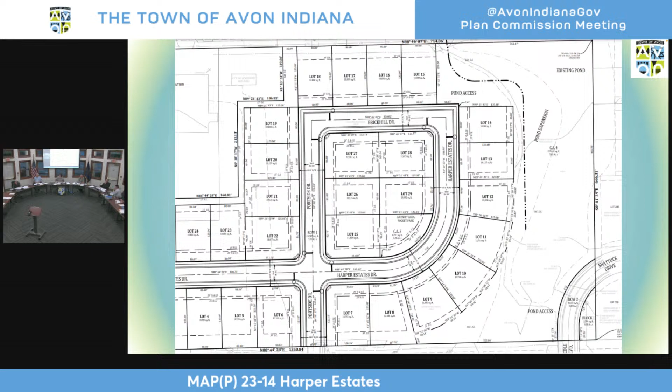As part of this subdivision, the church will lose its access onto Dan Jones Road and will connect to the access road here, so we'll get a closer view of that. There's a new drive along Harper Estates Drive. The pond here will be expanded to accommodate the increased runoff.

As I said, the subdivision of lands is occurring in conjunction with the town's Dan Jones widening project, so access, stormwater, and parkway have been designed together with the town. A lot of the details aren't totally finalized regarding the stormwater detention and things of that nature, but they'll be further reviewed throughout the final plat review process, as is typical for plats.

Because of the design of the stormwater detention pond, and the petitioner will be able to touch on this a little more, being designed in conjunction with the town and accounting for the town's runoff as well, they are unable to accommodate a 30-foot buffer because of the location of this pond here.

For that reason, they are requesting a waiver of the landscape buffer width. That wasn't submitted before your staff reports went out, but the waiver form and their responses should be on your desk. We do recommend approval of the waiver due to the design of the stormwater detention facility along Dan Jones. Other than that, we find the request consistent with the standards of the UDO, except for those for which a waiver has been requested, and for that we recommend approval of the plat.

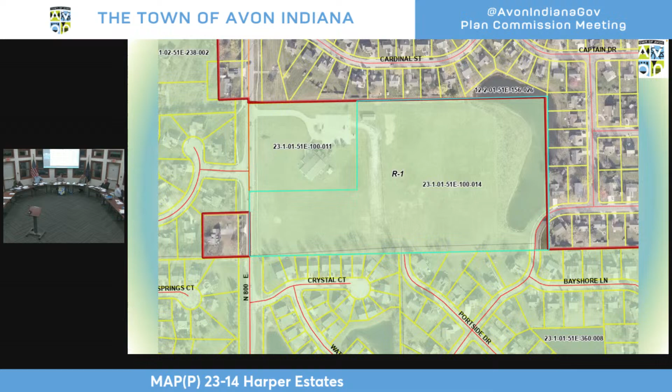Let's see, corner here. I wish I had... here we go. So we have the barn here that's on this property. So they're going to give some land for the barn here back to the church. And the church is going to swap some of the land in the corner here to allow for these lots. But I'm sure the petitioner can speak on that even further. The zoning's already been addressed.

So is there any negative impact to the widening of Dan Jones Road? Not that I'm aware of.

Then that detention pond, is that a dry detention pond or is it a wet one? As I understand it, I actually don't have that answer. I would let the petitioner explain their plan in detail. Okay. I'm fine, we'll wait.

Any further questions for staff? Okay, if the petitioner would like to come forward.

Good evening, Steve Brehob with Banning Engineering for the record.

We're glad to finally be here. We intended this to come in, I think, October, and then all of the moving parts that Ian talks about were really related to the town's Dan Jones widening project.

Originally, the town had proposed building their own detention basin on this site. And the more we looked at that, it just didn't make a lot of sense for the town to acquire property from this site and build a detention basin, and then for this project to build a detention basin right next to it. It didn't make a lot of sense for this project to build accel decel lanes and paths and sidewalks, and then have the town come through and tear all those things out to do the Dan Jones widening project.

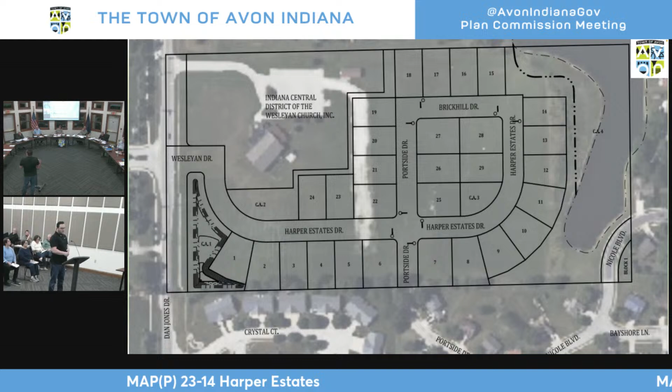While the barn is nice, the primary goal of our land swap is actually the new road development, which will give us access across the front of our field. We would be remitting our current access for the Dan Jones widening project. So to answer your question, we would close our current access whenever our new access was fully completed. That's the general basis of it. Otherwise, I'm just here to say I'm in support of it. I don't need anywhere near 10 minutes.

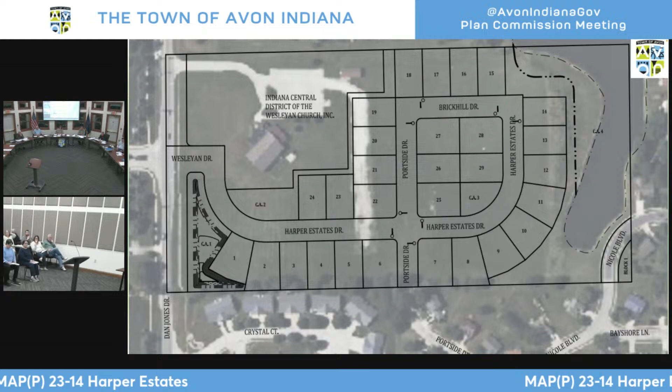Thank you. Is there anybody else who would like to speak on this agenda item? If not, I will declare this particular portion closed. Does the petitioner wish to provide any rebuttal to the support for your proposal? If not, we will move on to discussion.

Seeing that this is administrative in nature, it seems, at least in my opinion, clear cut, and I appreciate the information provided. We have two actions here. We have the request for the waiver, which makes sense to me considering the geographical location of the dry pond and everything else, and we also have the request for approval of the plat.

I just want to ask the same question again: this waiver will not have an impact on the widening of Dan Jones Road. No, it will not.

Does the waiver need to be voted on before the motion? I have one last question: what about remonstrators? Any remonstrators from Austin Lakes or from Waterford Lakes? None that are here today. I did receive several calls from one property owner on the boundaries here, as part of Austin Lakes. I believe this person was on the other side of the lake. We informed her that the lake would actually be increasing and that the houses wouldn't be directly up against that property line. That's the last I've heard from that person.

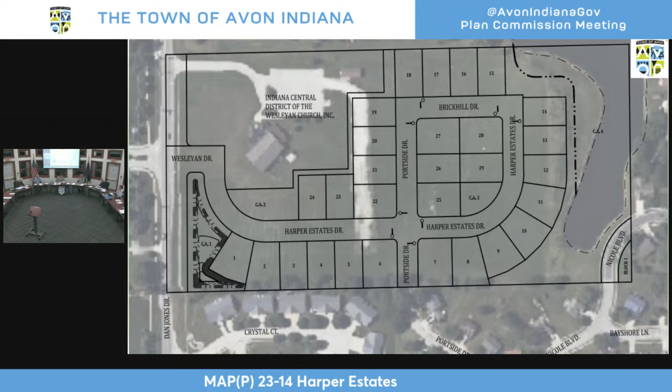I move that we approve MAP 23-14 Harper Estates primary plat, a request for approval of a major subdivision primary plat to develop a single-family residential development containing 29 lots on 16.39 acres, subject to the conditions outlined in the staff report on file, except that condition 6 shall be amended to read: approval is subject to an infrastructure contribution for required improvements that will not be constructed due to the adjacent imminent Dan Jones Road project. The amount of the contribution will be approved by the developer and the town prior to final plat approval. Let's take a vote.

Catherine Ransberg, aye. Paul Guckenberger, aye. Bill Reed, aye. Greg Zuzen, aye. Mason Pike, aye. Okay, motion carries.

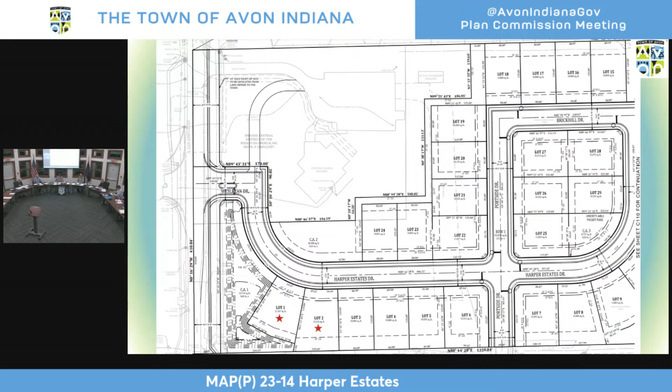I do want to take a second to remind the petitioners for the remaining items, and I should have brought this up earlier, we have a minimal quorum here tonight. So it only takes one person who says no to an approval for that petition to fail. It would take two, I'm sorry. So you might want to consider whether or not you wish to ask for a continuance so that this could be heard by the full quorum. Just something for you to consider as petitioners.

Okay, moving on to next new business, which is Mission Foods.

This is ZA 2306 Mission Foods. It's a request for approval of a zoning amendment to rezone 13.208 acres from R2 to I3.

There's no significant land use history associated with the subject properties. They are improved with single-family residences, and there's some agricultural activity that happens on the property.

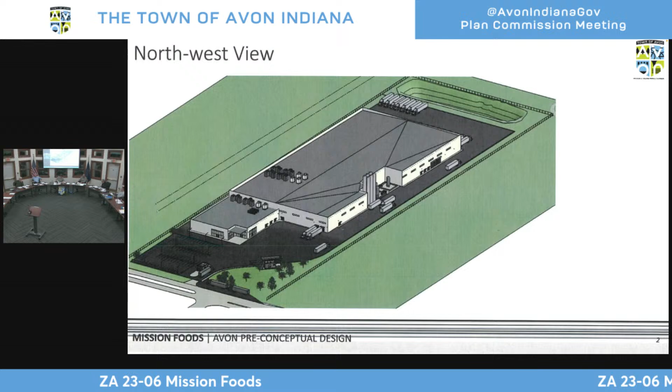Here's a preconceptual design of what's proposed for this property here. The residences would be on this side here. And again, this is just pre-conceptual.

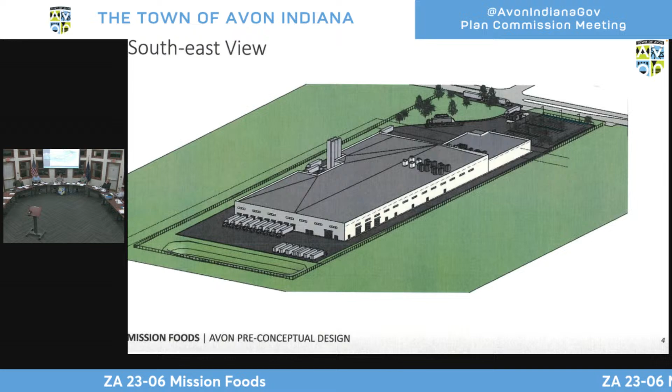In the submittal of these zoning amendments, in their introduction to the town council, the petitioner has been relatively vague about what is happening here. I believe in the town council meeting, they did mention that they may rezone it and not develop it immediately. So with that said, careful consideration should be made about what is being proposed as part of this rezone, and impose any necessary commitments that you may deem necessary.

And from staff perspective, we have in our staff reports recommended prohibiting undesirable uses that are not conducive to being located nearby residential uses. Our fear is, hey, at this point they are proposing a small warehouse on this property. However, should they walk away from the property after it's rezoned and someone else purchase the property, we don't want to allow certain uses that we weren't expecting as part of this rezone.

So we do recommend that you forward a favorable recommendation to the town council, subject to the following commitments. And this is a list of uses that we recommend be prohibited by commitment.

That is automobile services light, automobile services heavy, recycling drop-off facilities, composting facilities, mineral extraction, manufacturing, fabricating and assembly heavy, contractor special trade heavy, contractor yard, heavy vehicle equipment sales, rentals and service, transportation services, rail and air, utility major impact, rail distribution yards, truck freight terminal distribution centers, and wholesale trade or storage general.

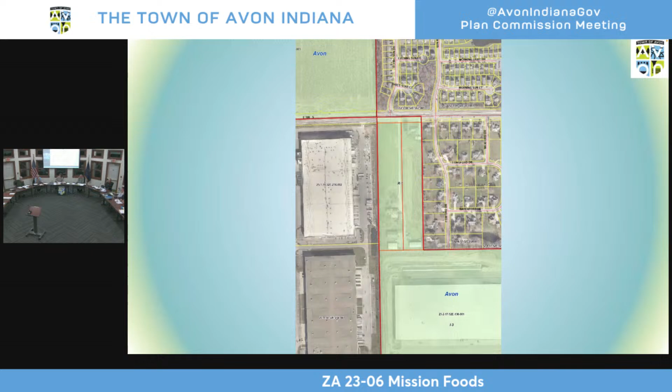Okay, Ian, do you have a map that you can show us the existing property of Mission Foods as well as 100 South? This may be the best that I have available to you right now.

When they came to the town council, some of the questions we were asking them were whether they were going to do an inner property connecting road, because once they got out onto 100 South, could they get into that property or not, or did they have to come from another direction? I guess we told them that at that meeting, and now we're still in the same boat we were four weeks ago. The part that concerns me is it's very vague.

We don't normally have people come in and say, hey, instead of an 80-foot arborvitae evergreen, I'll put in a 30-foot one. Why? That seems odd to me too. Why would somebody request that? I don't know their response, but increasing the screening of the two properties, I think we would probably want to look at the buffer, the 30-foot buffer, and maybe add more than just the 30 feet. Sure, but we don't have enough information yet to make that determination.

And there's not been any—this is just, we might build something there? I think you would best direct these questions to the petitioner. Okay, thank you. Any further questions for staff? Nope. Okay, the petitioner can come forward, please.

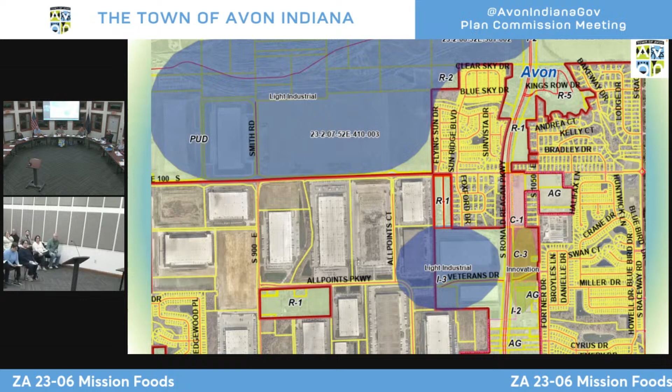Tilt that back. Good evening, Plan Commission members. For the record, my name is Tyler Oakes. I'm with Bose, McKinney, and Evans, 111 Monument Circle, Indianapolis, Indiana. I'm here today on behalf of the petitioner, Gruma Corporation, the parent company better known as Mission Foods. For those who are unfamiliar, Mission Foods is the #1 tortilla distributor in the United States. They've got about 19 to 20 plants currently, with the headquarters in Dallas. We come today requesting a rezone from R1 to I3.

Ian did a pretty good job going over the history, so I won't go too in depth on that, and I'll just jump into some of the concerns it sounds like we have from the members. First off, I want to address the vagueness of the petition. I want to qualify that—it's not vague in the sense that they know they're going to be doing a small warehouse. It's more of a question of their operations. What are they going to do? Is it going to be more offices, or more manufacturing and distributing? It's going to be a combination.

Really, what this is intended to do is support their main manufacturing plant directly to the west of this property. That plant has about 500-ish jobs created, and they process about 1.8 million pounds of food annually. It's a major production plant, and this is going to support that. These lots became available, and our client, knowing they wanted to grow, jumped on and bought these.

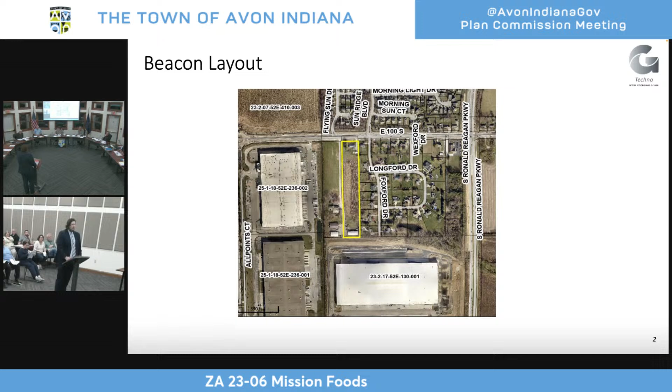Skip ahead a little bit. There's another picture just showing there's 2 lots there. They bought both of them, and they're rezoning both of them. That's the one directly adjacent to the neighborhood to the east. You can see how close Ronald Reagan Parkway is on that one as well.

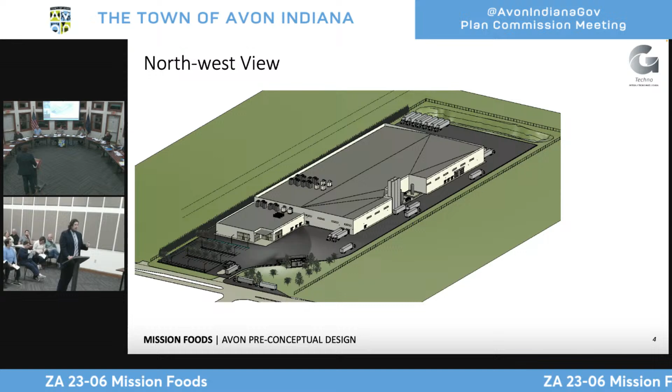Ian showed some of these preconceptual views. We're fairly confident it's going to be something, if not this, very close to this. I want to get to... skip the ordinance, but there should be...

Hopefully not as much sound or noise. The loading would be in that middle portion on the west side of the building, where trucks might be stored. They're going to assist in manufacturing, distribution, and administrative aspects.

The other thing I want to bring to your attention - I don't know if this can zoom in, but on the north, or top of the screen, the eastern border, we have a 30-foot buffer drawn out, and on the part of the buffer closest to the proposal there are thuja giant trees.

One issue with the commitment - we said they'd be every 8 foot. I've learned today, after researching these trees, that they can grow to a diameter of 10 to 12 feet wide, which would make that impractical. The goal is that these trees are packed so close together you would not be able to see in between them.

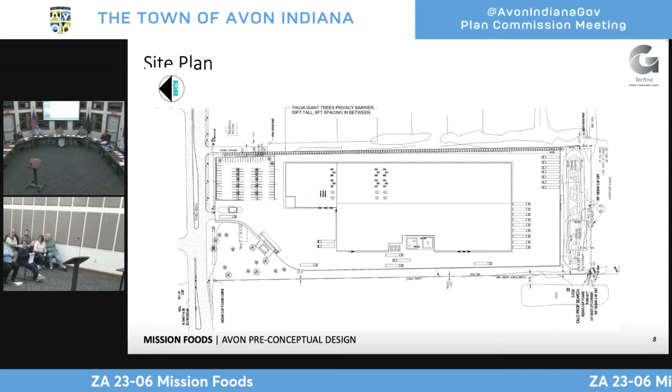Please state your name and address. Hi, my name is Rhonda Koch, and my address is 1177 Waterford Drive, Avon.

I have a lot of questions, and I live directly on the other side of the trees that might be planted. I've lived there for 30 years, so I know there's lots of changes that have happened since I built my home. One of the many things that happened was looking at my backyard and watching the Walmart warehouse fire, explosions, and having to live through the fallout that came from that, which was very scary and devastating.

This means more warehouse facility will be moved even closer to my residence. The tall trees are great, but they will take a minute to grow, as I've planted 8-foot pine trees in my yard 30 years ago, so I know how long it takes, even though it's a different tree. Get it? It's a noise factor also, with unloading and loading in the middle of the night. If you saw the map, on the other side of our property is a new warehouse, so we already deal with it on the north side, the tail end of our property. There are lights, which I know they need, but they are very tall and very noticeable. We deal with that.

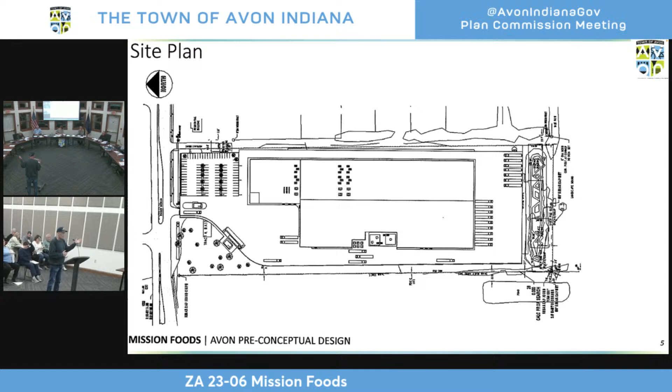When you've got those big slabs of concrete and stuff, and when that Walmart caught fire, you couldn't open your windows for almost 3 weeks. The smell was unbelievable, and OSHA came out there with their gauges and said they were on the verge of it being red and not green.

I don't understand why they can't just move that whole building to the west. And if they wanted a building that bad, why didn't they buy the Walmart building next to it that burnt down, which they've already rebuilt?

I don't understand why they had to have this property and put it so close to our subdivision. It's just unbelievable. And this plot plan doesn't tell me how close this is going to be to my property line. Can they tell me that? Does anybody have the answer?

That's what I'm asking. I want to know how close this is going to be to my property line, plus the 34-foot buffer. That buffer ought to be at least 50 yards away. This is an existing subdivision—we've been here 25 years.

I'm upset about the whole deal. I used to be able to look out and see Moore Street. When this comes in, I'm not going to be able to see nothing. It's all going to be blocked.

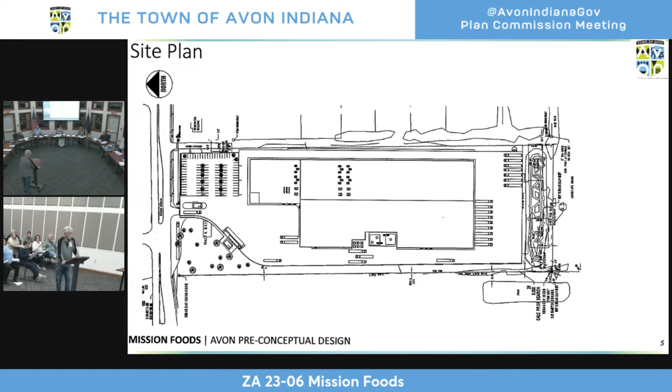As I sit in my family room at night, I see Mission Foods trucks going every which way, every night. It's that close to me already, where I can see them and hear them. And we're worried about all the diesel smell. It's just not right what they're trying to do.

As my neighbor stated, our neighborhood was a paradise. When I moved there 21 years ago, it was beautiful—it was our dream house. And now, with everything that's happening, not just with the warehouses but with Highway 100 being 4 lanes, it's a nightmare.

So that's all I have to say. I just hope you would consider our neighborhood when you make your decisions. Thank you.

Would the petitioner like to step forward for 5 minutes of rebuttal?

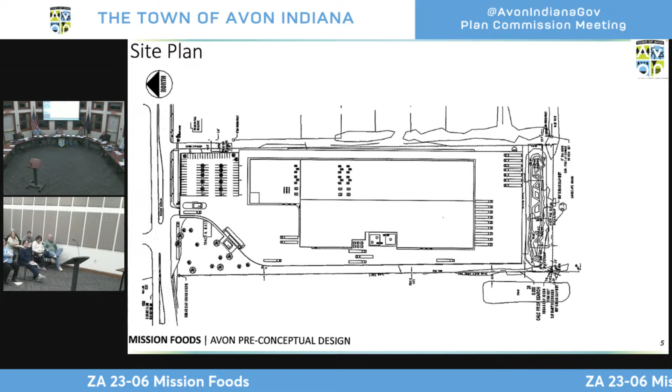Again, for the record, Tyler Oakes on behalf of the petitioner.

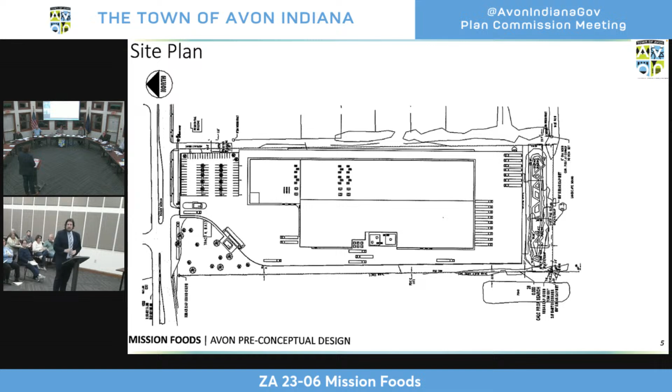Just to address a couple things, I apologize to the first gentleman who spoke. There is an updated site plan. If you're able to pull it up, we can get you a copy. It has some of the measurements showing the distance. In regards to where they're placing the plant, they're putting it pretty fairly close to that western edge, obviously so they want them to work in conjunction.

It's an accessory use, and I understand the concerns of the neighbors regarding the warehousing. Our view is that this is, based on the cluster map, a perfect use for the area because it's not as intensive as the warehouse to the west, and it kind of bridges that industrial to residential, being a scaled down version of what it's assisting. So I can understand the concern, which is why we're putting the trees there.

Ultimately, I won't go too in depth on the others. I think it's clear, and what's best going forward is probably to request a continuance. We'll come back in front of the board with more carved out conditions specifically related to the UDO, and have a more concrete site plan for you. So if it's okay with the board, we would request a continuance.

You're requesting a continuance? Yes. Have there been any previous continuances? There have not. How far out would you like to continue this, to the next meeting or two months out? Let's do a month, to the March meeting. Yes, please.

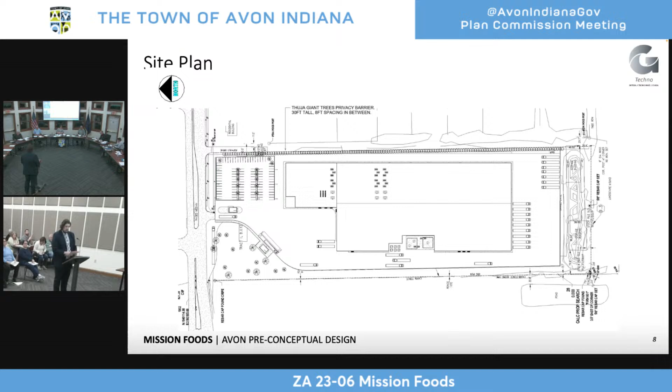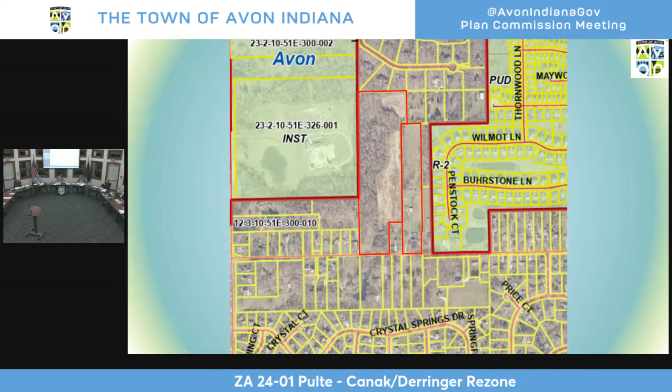Immediately to the west is the Murphy Park Aquatic Center. However, on all of their other sides, we have single-family residential uses.

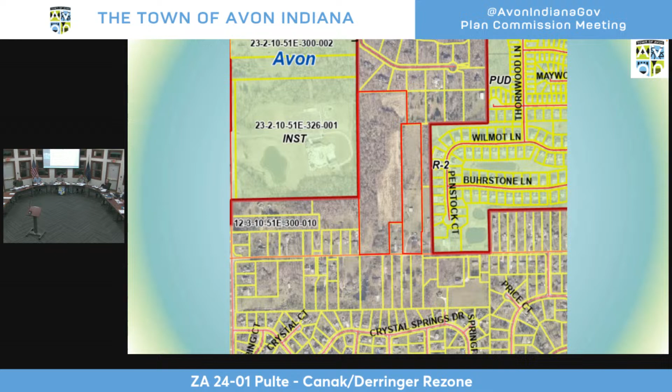Again, it's a request to rezone 23.1 acres from Hendricks County zoning RB to Town of Avon's R2 to allow for the development of a 39-lot single-family subdivision. As I understand it, they intend to utilize the enhanced architectural and lot standards, but that's nothing we have to approve today - this is just a rezone. The request would result in a density of 1.68 units per acre, significantly less than the maximum density of 3.0 units per acre allowed by the R2 zoning district, and the 4.0 units per acre allowed with enhanced lot standards.

The Town of Avon's R2 mixed residential zoning district is the closest equivalent zoning district to the Hendricks County RB single family residential zoning district. The main factor is they have equivalent lot sizes of 12,500 square feet.

However, keep in mind - just one thing there, it's not a big number, but your 1.68 is transposed, it should be 1.86. Is it mine that's transposed or is it theirs? On their design it says 1.86. I think 39 divided by 23.1 is 1.68. Some of them just... I do my homework too, Greg. And we appreciate that very much. Let's do 39.

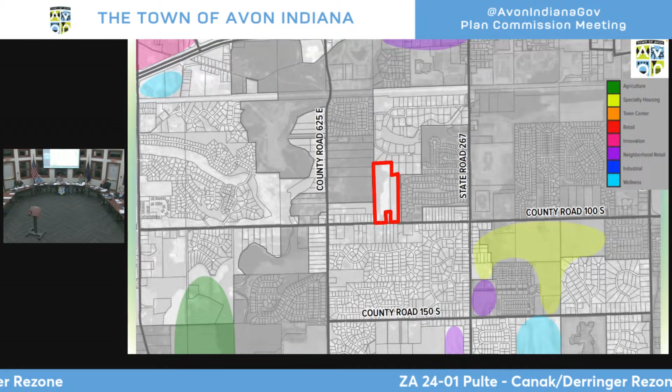So ultimately, we do recommend that the Plan Commission forward a favorable recommendation to the Town Council for ZA 24-01 Pulte-Canak/Derringer, subject to 3 commitments. One, that a 60-foot half right-of-way shall be dedicated along the entirety of the subject property.

Two, that the petitioner shall make arrangements for required off-site road improvements by either A, paying an infrastructure contribution in lieu of the road improvements in the amount of the reasonably estimated cost to acquire the right-of-way and construct the improvements, the amount for which would be agreed to by the developer and the town prior to final plan approval, or B, follow the procedures set forth in section 7.21F of the Avon UDO, including the provisions set forth in section 7.21F. If you have questions about 7.21F, I can answer those.

Lastly, this is a bit of a redundancy, but the recreation impact fee of $1,227 shall be due at the time of permitting for each lot. We did have a situation where this was called into question, so we'd like to add it as a commitment of this approval so that there is no question moving forward. With that, I am available to answer your questions.

So the petitioner could potentially or arguably right now do as they would like under RB in the county, right? The only reason we're hearing it is because of the rezone or the annexation.

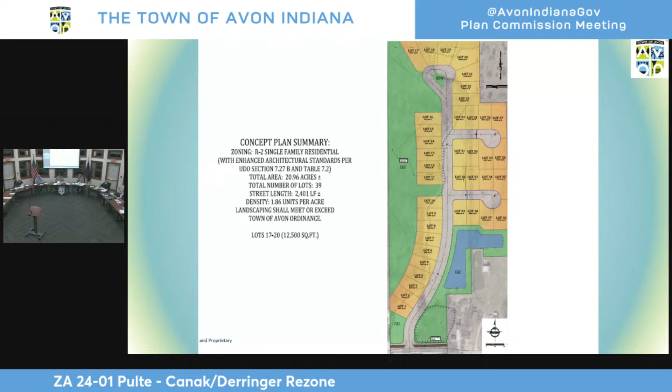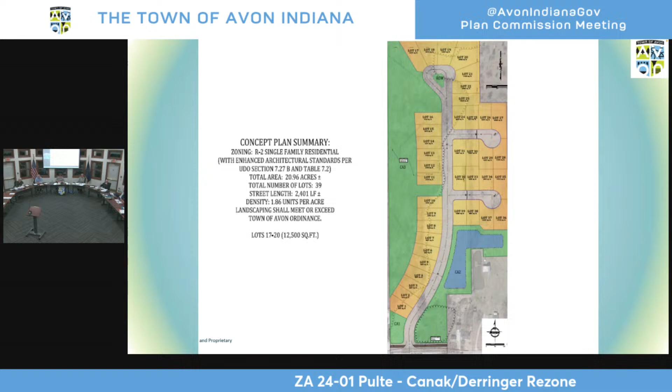I'm glad that we touched on this. So under R2, the equivalent lot size is 12,500. Our ordinance does allow for the enhanced lot standards in exchange for increasing the architectural standards. We do allow smaller lots. In this case, they are proposing 10,000 square foot lots. So I don't believe that they would be allowed under RB to do 10,000 square foot lots.

Which would be going down or going up? What's proposed is less than what is allowed in the RB. Okay, under the enhanced lot standards. Gotcha, thanks.

Would you mind repeating that for me? Sure thing. So RB allows for a minimum lot size of 12,500 square feet. Under the prescriptive lot standards for R2, the minimum lot size is 12,500 square feet. However, the town of Avon's ordinance does have a provision for enhanced lot standards and enhanced architectural standards. Basically what that allows for is, in exchange for a higher standard for the architectural design of the building, the town of Avon does allow for a reduced lot size of 10,000 square feet. Thank you, minimum lot size.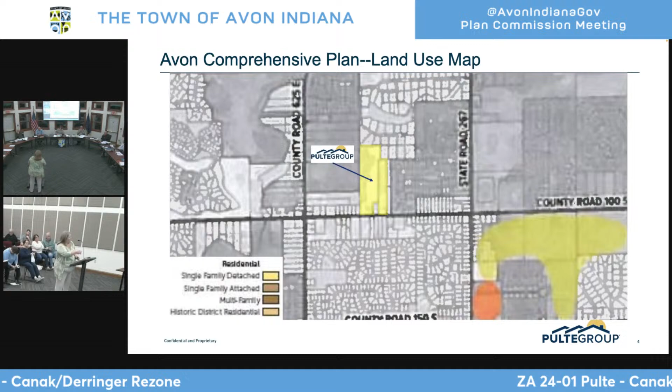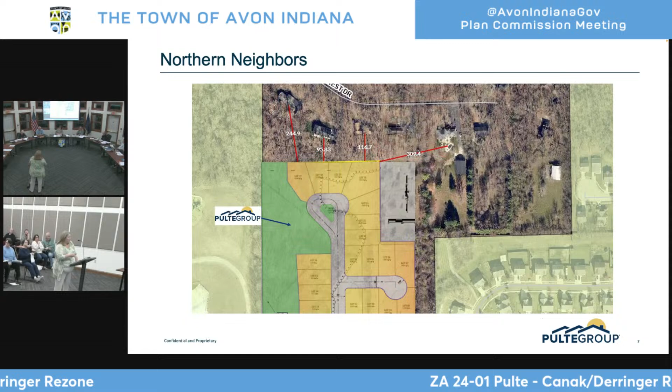One thing I would also note, I did an analysis - all of those homes with red arrows on them were purchased after 1992, when the property, at least I can document, was zoned R2. So it's always been an expectation that this property would develop residentially. This is not a farm field that we're converting.

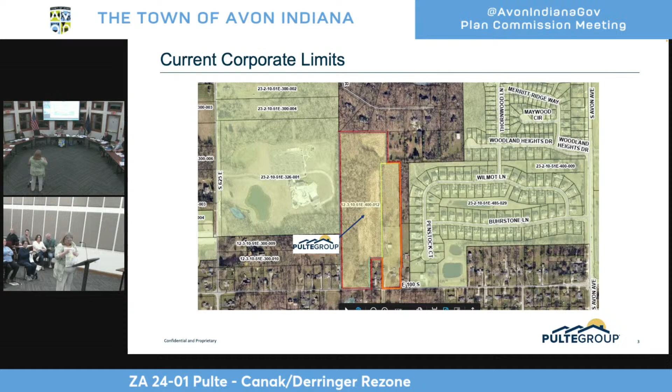Right now, as you will recall - can I get my screen back up? WCCD is up here at the top of the Canak property. We're going to have to bring the sewer all the way down from the north to the south, and probably run manholes at each property corner, at least on 100 South, for other people to connect to. So we are going to be bringing that sewer a lot closer to those people having problems on 100 South, and that's, I think, one of the best benefits for the town of Avon that this subdivision is going to create.

The reason why there are large lots in Lake Forest Estates is because it was platted in 1973. There are no drainage facilities, no public storm sewers in there, no water, no wastewater - they're all on septic and wells. There are substandard roads; they don't have curbs and gutters and drainage and sidewalks and all the things that we have to do as part of a modern subdivision.

All those things cost money. That is why we cannot develop any longer at 70,000 square foot lots - that is the size you need for a septic system. We are not doing septic systems; we don't think they're the environmentally friendly thing to do with a modern subdivision. So that is the reason why lots today are a little bit more cost efficient at somewhat smaller lots than that.

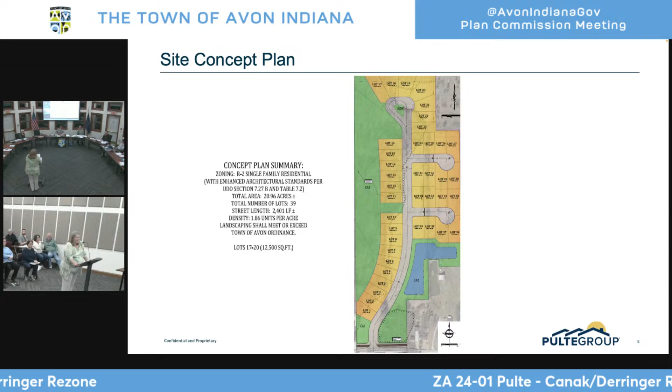There are some evergreen shrubs on there that I think could be amenable there. But that's part of the problem is they're so densely wooded already that they really aren't going to be impacted very much by this subdivision, and aside from the fact that they're a lot lower in elevation. So if you have any further questions of me, I'm happy to address them.

You are requesting a continuance, however, at this time? Yeah, and please leave the public hearing open so that if Mr. May attends next month, he can make his comments known at that point.

I'd first like to correct a statement I made earlier regarding the minimum lot size. I had said 10,000 square feet. I was conflating that with Harper Estates, which we had said earlier. The minimum lot size for R2 enhanced lot standards is 7,200 square feet. So I want to make that clear. That was a mistake on my part. I apologize. But we will be significantly in excess of that, and we would commit that we won't have any lots smaller than 8,900, I think is our number.

Do we have any objections to petitioner's motion to continue? I'll entertain a motion. I'll go and make that motion that we continue ZA 24-01 Pulte Canak Derringer rezone to the March 25th, 2024 meeting. Second. Let's take a vote. Catherine Ransberg, yes. Paul Guckenberger, yes. Bill Reed, yes. Greg Zuzen, yes. This agenda item is continued to next month.

I do want to express my appreciation to all of you who have attended here, who have been very respectful. You have presented us with very good questions and very good items, and that is something we always love to see, an engaged community. So, let's move on to the next agenda item. Thank you very much.